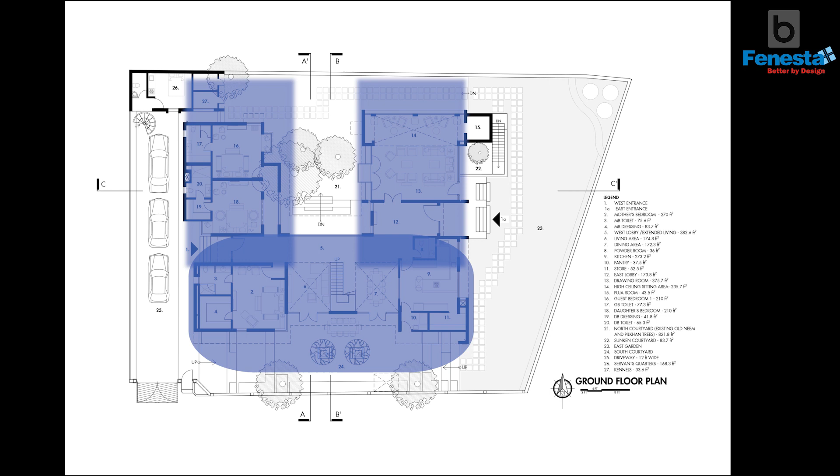Since the trees were beneficially present in the north side of the plot, keeping that as the starting point, we developed the house around the 3 trees in the form of a simple U, I would say. This arm of the U had the public spaces. The central part had the semi-public spaces, which are like the living spaces and the dining spaces. So this arm of the U had all the private spaces, with this edge acting as a buffer from the western sun.

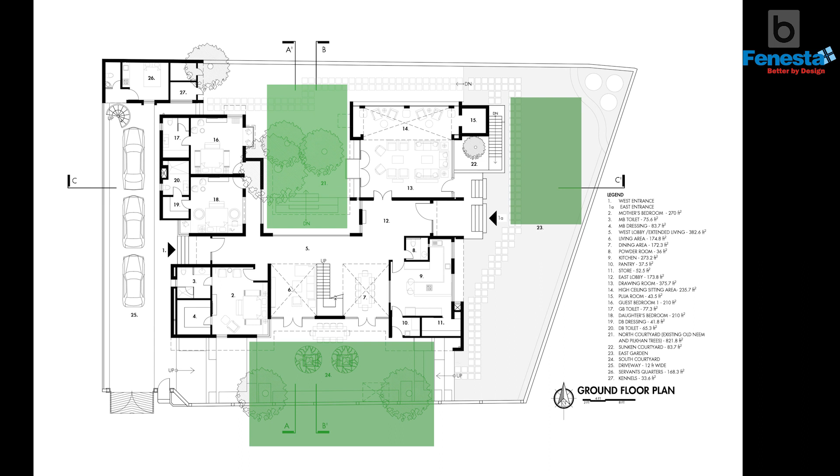And what happened by doing so was that we got actually not 1 but 3 green spaces in the house. This was the north courtyard, this was the south courtyard, and we had a lawn on the east, and this is where the cars would enter, and the driveway was present on the west. The house is accessed through 2 main entrances. One is next to the driveway. So this was one entrance.

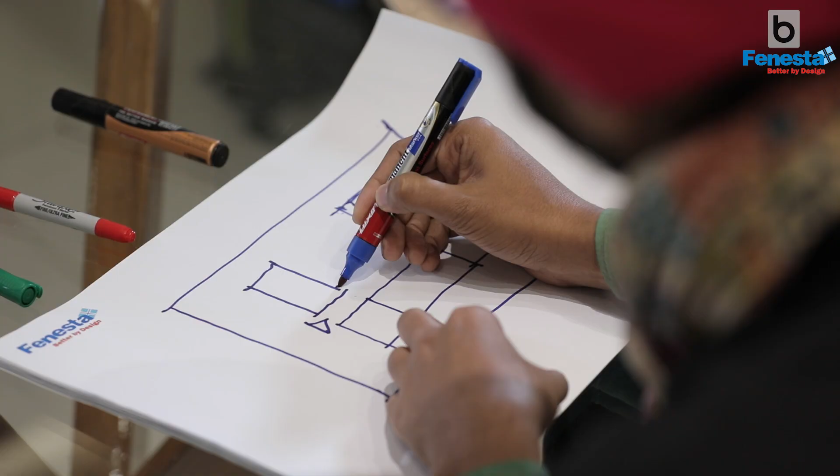The master bedroom was placed in the southwestern corner. This, as I have already mentioned, are the dining and the living space. This was the drawing room, and this was the kitchen. So the north courtyard had this patio, which we detailed in a way that it becomes a space where people can sit. The south courtyard, we planted 2 Frangipani trees here.

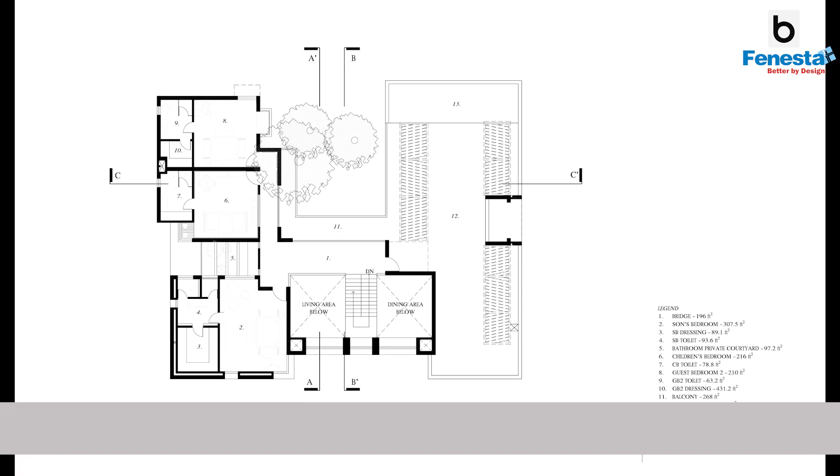The moment you entered the first floor, you would again see the central courtyard. This entire stretch of the building was glazed, and we had again the private spaces, which were the bedrooms. So the house in all had 6 bedrooms. 3 of them were on the ground floor and 3 were on the first floor. So on the first floor, what we also did was that we created a small courtyard, a private courtyard, open to sky space for the son's bedroom and toilet.

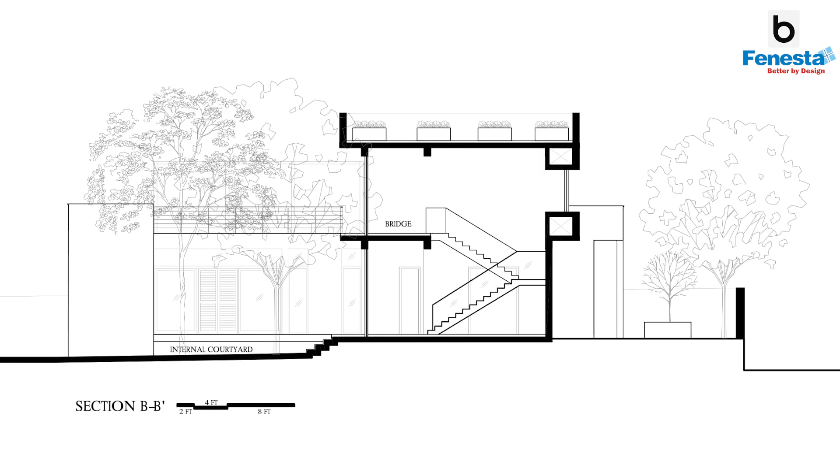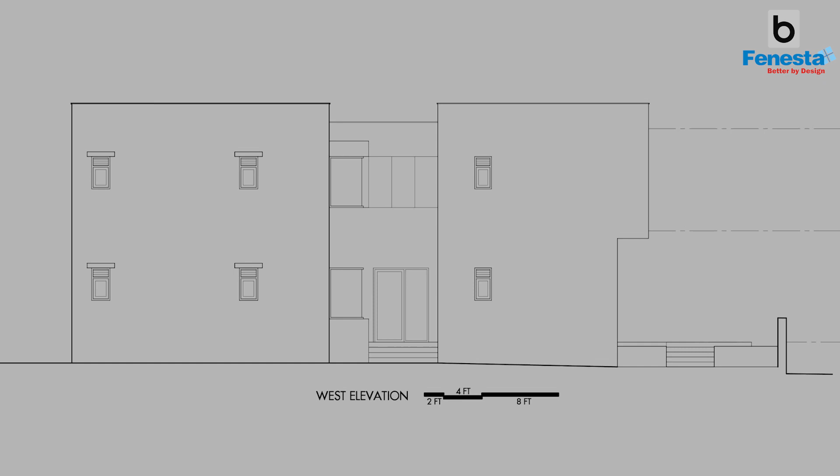Just drawing a small section of the house. The house extended towards the south to cut off the summer south sun, allowing only the winter sun, which is lower. So the western edge was mostly solid with the entrance, a double height entrance. The southern part of the house extended, the first floor extended beyond the ground floor, and the southern part had deep recessed windows, with the ground floor being a little recessed. Then the eastern edge had again a double height entrance or access area for the eastern lawns.

In terms of the material palette, there were some very strong considerations that we had kept. We only used, because of ecological reasons, stones which were sourced locally within a 300-kilometer zone. So Kota, Jaisalmer, then Indian white marble, then Khareda. This was the palette which we employed within the house as well as in the exteriors as well as in all of the landscaped areas of the house.

This particular project for us has been that design, conventionally as it has been seen, is obviously a human-centric process. And just by the virtue of saving the existing, I would say, natural ecology and these three trees, what we were able to achieve is that currently the client is documenting the birds that are coming in the house. So he's getting about 10 to 15 species of birds, which are coming in the house. And he's currently on his own, photographing them and documenting them.